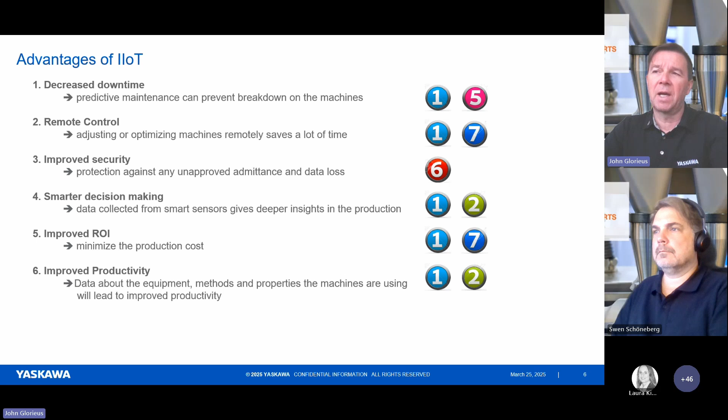But now the question will pop up, why didn't we use that already 20 years ago? It's a good question, but also the answer is easy. We didn't have the equipment and the know-how for this. The key to successful IIoT is AI. And what does it mean, AI? And what about machine learning or deep learning?

So in a later step, we used machine learning. A machine learning based algorithm is used to solve the problem of fruit sorting by enhancing the artificial intelligence based approach. When labels are not present, but the definition of what each fruit looks like is available, this is called feature extraction. To do this, characteristics and attributes that identify each fruit are used to create a blueprint. Characteristics such as the size, the color, the shape. If it's long and it's yellow, it's a banana. These characteristics are extracted and used to train the algorithm to classify the fruit.

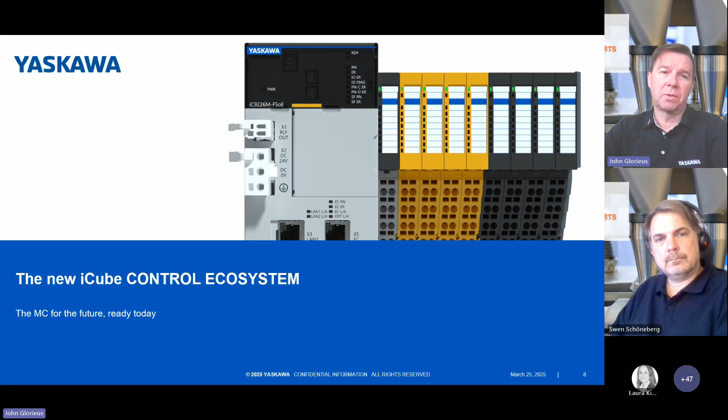This iCube control, the brain of it is the Triton chip, developed by our own company, ProfiChip. This Triton chip has a 3-core ARM processor with a clock speed of 1.26 gigahertz, which we need for the high demands on synchronous movements that we have.

Compared to other processors, we also have a much lower power dissipation, and derating starts only at 60 degrees ambient temperature. Therefore, we do not need a fan, which is very important in certain industries. So this feature helps us with challenge number 7, the sustainability.

The iCube has also an integrated safety master with FSOE as network safety profile, which can meet SIL 3 requirements. So you get more for a smaller price, helps you for challenge 1.

The iCube has a modular design built on a real-time Linux system, which we developed together with Phoenix Contact. This helps you also tackling challenge 1, because we make sure that you only buy what you really need for your application.

Our main network for motion is EtherCAT, but we also support other networks such as Profinet, OPC-UA, Modbus TCP, and Ethernet IP. So if your supplier can't deliver your product with a Profinet connection, for example, you can easily switch to the same product, but now with an Ethernet IP connection, for example. So your supply chain is flexible.

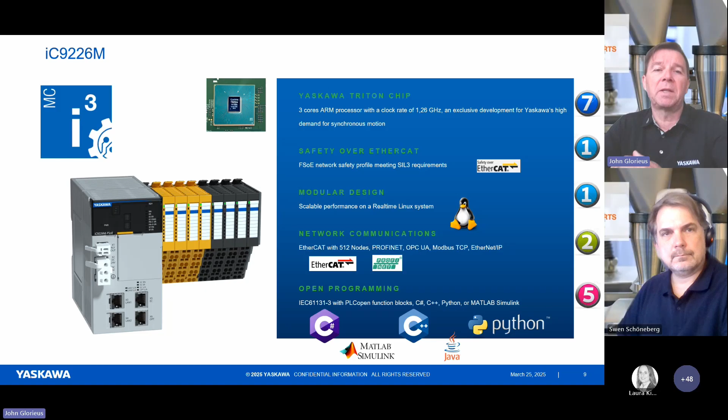Another great asset is the freedom of programming. So you can program not only in IEC 61131, but also in C#, C++, Python, Java, MATLAB Simulink. It's all possible. So you can really choose the language you know the best. This will help you finding the right people for your R&D department.

I explained before that the cloud is getting more and more important. But how can we connect our iCube to the cloud? There are several ways, but we start with connecting the iCube over one of those 2 Ethernet ports to the internet. Internally, these 2 ports are switched, but if you need 2 separate IP ranges, we can open the switch.

Since our platform is based on Linux, we can run all different kinds of Linux apps on our platform, even in containers. In the App Store, you can choose which app you want to use.

For example, the IXON Cloud app has a remote VPN access, or for data logging and alarming, or for MQTT data transfer. Another possibility is the ProfiCloud connector app for connectivity to the Phoenix Cloud. And another one is the IIoT library app for connectivity via MQTT to clouds like Azure, AWS, GCP. So this helps you encountering challenge number 7.

Decreased downtime can be achieved by using predictive maintenance, which prevents breakdowns on the machine. The iCube will collect all necessary data from the servo pack and send this to the machine learning algorithm, which is trained on the Yaskawa product.

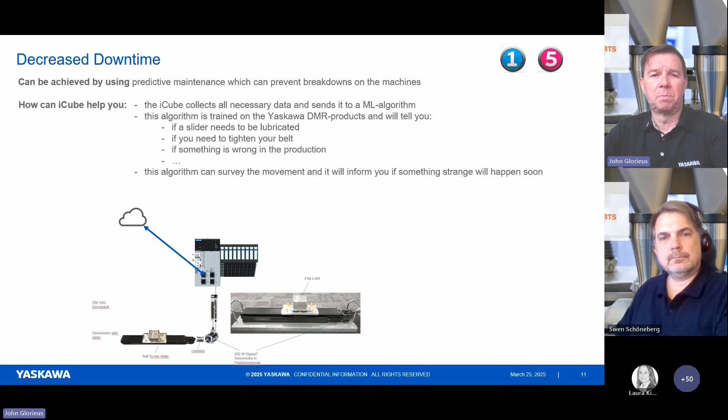But what you hear a lot in my presentation is sending data to the cloud. This means that your machine needs to be online. And then we should protect the system against unapproved admittance and data loss. So iCube...

developed a dual way of security with integrated security functions and settings in the WBM. The first one, the built-in features are based on the Linux operating system, and they have services like a firewall, OpenVPN, SFTP server, and so on.

And the second one, the settings that you can do with the WBM manager, like security profile that you can set up. You can have a user authentication. You can have a syslog configuration.

So these are all features that need to be updated constantly. And that's why we founded a new department. We have now our own cybersecurity department. So this is obvious. This is how to tackle challenge number 6 with this feature.

With our iCube, you have also the freedom of field bus choice. Like I said before, you can simply continue to use the devices that you control via EtherCAT, Profinet, Modbus, OPC UA, or Ethernet IP. The only restriction we have is EtherCAT is the only field bus for real-time motion commands with the FMK, the flexible motion kernel.

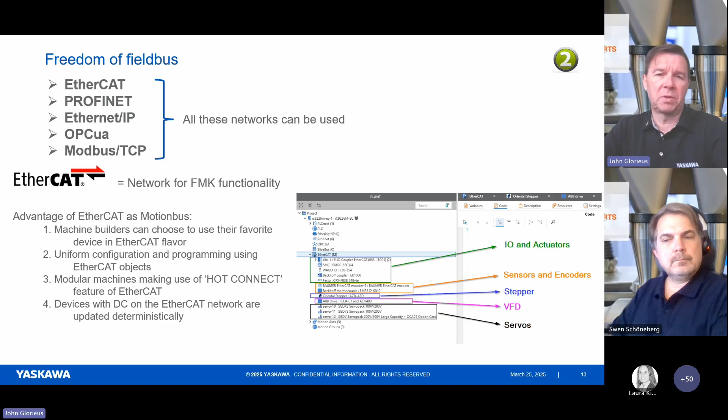I will show you briefly how we can add a product from a third-party supplier via an ESI file to our platform. First of all, we open a project.

Then we go to File and then Import, and there we choose Import ESI Files. Then we search for the correct folder on our PC and select the correct XML file. You can check if you selected the correct product and click OK.

Hopefully the snack bar will tell you that you imported this device successfully and that you will find it in the device catalog. The device catalog is on the right side, and if you click a few times, you will find exactly the device that you imported.

Now you can manually integrate your device in the EtherCAT device list of the plant. So the left side is the plant side, and there you can choose the stepper module that we integrated.

If you open the property window for your device, you will find all the parameters that the provider of this device makes available for us in order to operate this device in the right way via EtherCAT. So you see here error code, set point, control word, and so on. You will find all this as parameters.

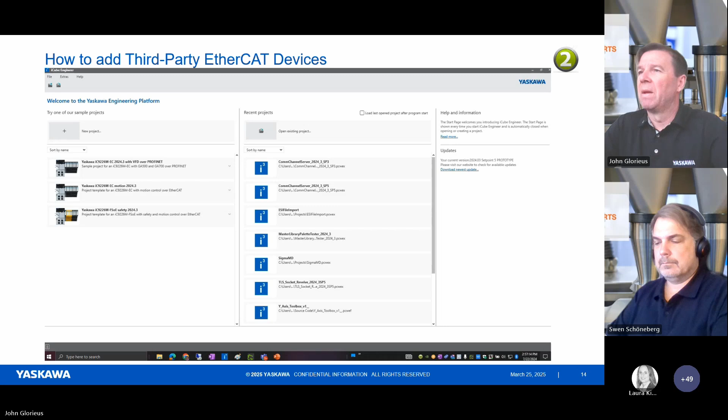Not only do we have a freedom of field bus, but we also have a freedom of programming with iCube. But also here we have some restrictions - not all languages can be used for all purposes. That's why we should have a closer look at our iCube architecture.

This is the architecture, and we can draw two lines over this architecture. The first line divides the platform into synchronous or asynchronous execution of your program, and the second line into running your program on the iCube platform or remote. In this way, we divide our architecture into 4 quarters.

The first quarter is synchronous execution running on the iCube. The second quarter is asynchronous execution also running on the iCube. The third quarter is asynchronous execution but remote, and the fourth quarter would be synchronous execution and remote, but this is not possible. So the first quarter means a program which runs in a real-time task on the iCube.

This can only be programmed with IEC 61131, C++, C#, and MATLAB Simulink. The second quarter is running directly on the Linux platform, but the code will run asynchronously to the real-time task of the iCube. The third quarter is to run the program on an external PC, but also asynchronously to the iCube real-time task.

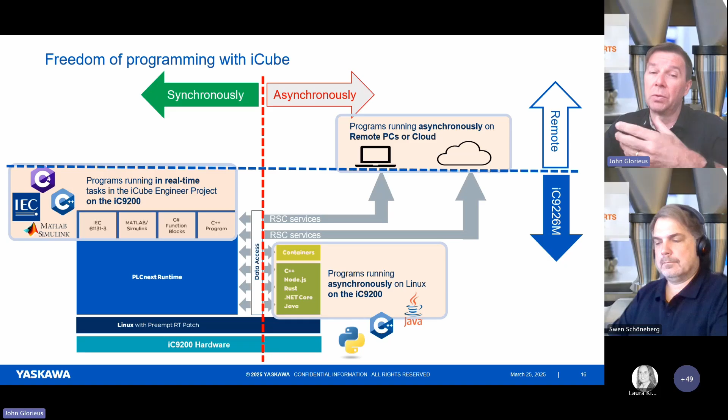So first, let's look at the first quarter and the possibilities to program synchronized to the real-time task. We can write functions, function blocks, and POUs in C++ and C# in Visual Studio or Eclipse.

Currently, we do not support MATLAB Simulink at Yaskawa. Phoenix and the PLCnext, they have that already, but we didn't implement it yet.

What are the advantages of C++ and C#, and why should you use it? Advantages are there are a lot of reference libraries available, for example. Another advantage is that for every 5 engineers who know C#, there's only half an engineer who knows IEC 61131.

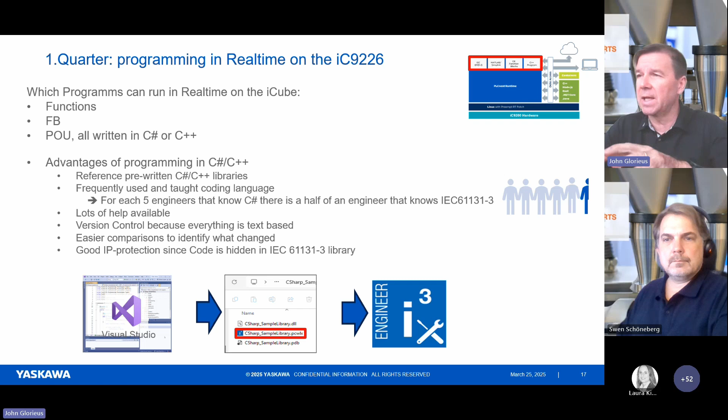Also, there's a lot of online help available. There's good version controlling. Easy comparison is possible. And good IP protection is possible because the source code is hidden in an IEC 61131 library.

So for programming in C#, Yaskawa delivers a toolchain with functions, function blocks, and programs. And this, like I said, is for Visual Studio and Eclipse.

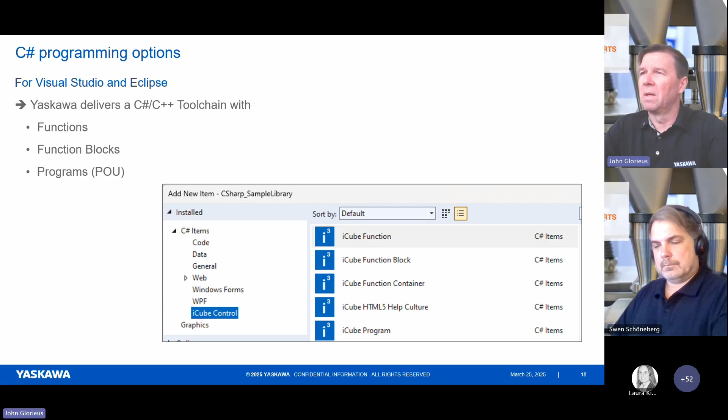Now I will demonstrate how a C# program can be integrated in an iCube controller as a library. The public classes that you define here will pop up as a function block in the iCube Engineer. In this example, this string example FB.

After compiling your project in C#, you have 3 different file types that are generated: a DLL file, a PCWLX file, and a PDB file. This PCWLX file is the file that you need to copy into the iCube Engineer library folder.

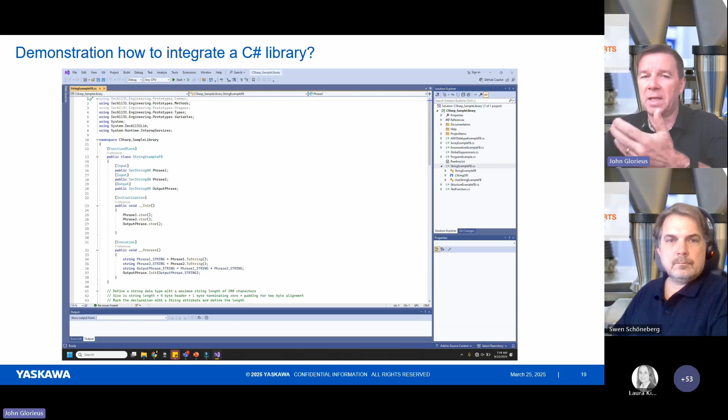If you do so, you can add this code as a user library in your project in iCube Engineer. You can now add the classes that you defined in C# as a function block in your IC library. So here, all the functions that you see were the classes that you defined in C#.

How can we integrate C++ in our iCube environment? For that, we offer you a C++ SDK, software development kit, which we deliver also for Visual Studio and Eclipse, and we have 3 different project types that you can use.

First of all, the PLM, which can run as a POU in a cyclic deterministic task. An ACF, the application component, which can run on the Linux section of our controller, and their execution is triggered by remote service calls. The last one is a consumable library project, which is just code that can be used in other projects.

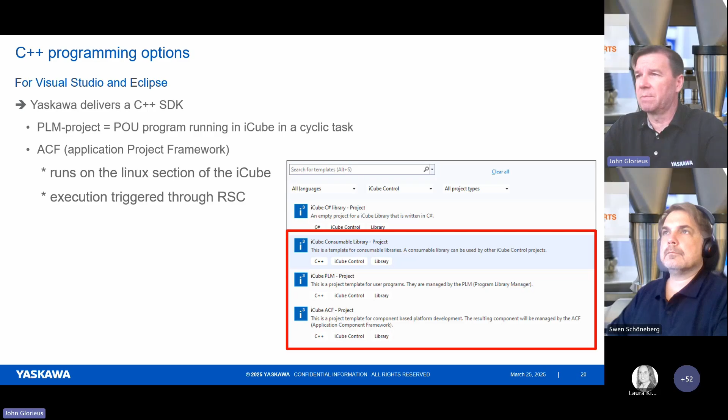I will demonstrate how to integrate C++ code as a POU. First we configure the in and out variables of the program.

Then you program your C++ code in the C++ environment. After saving and placing the file in the right folder, it will pop up in the component tree in the PLC Next component folder.

You need to configure this POU in the ESM task, where it will run as a real-time synchronous POU within an IEC task, for example in the fast task.

Communication with the other POUs is done with in and out ports on the global data space. So in the watch window, we can now force the variables, and you can see immediately what the program is doing with the output.

So this was the first quarter that we looked into a little bit in detail. Now we go to the second quarter, and there we have two possibilities. The first possibility is to integrate a programming running directly on the Linux platform of the iCube.

This means that our iCube is not just a motion controller, but it's a complete computer running on Linux. What does it mean? This means that all files are accessible like in Windows Explorer, which means that we have a consistent file management and file sharing, and also remote access is possible.

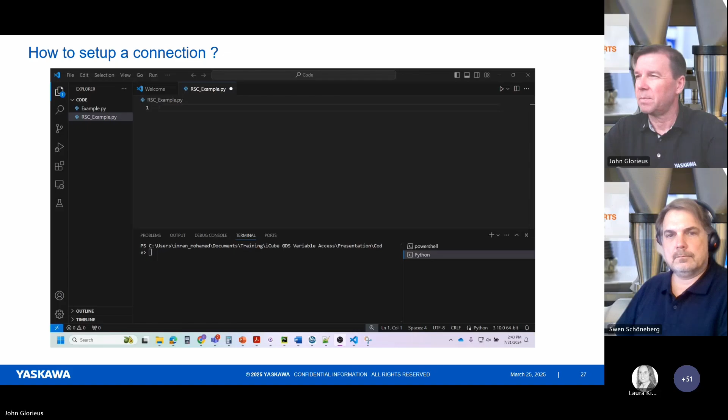So now we are online, and the next step, what we can do, we will read some info and some status data on the iCube. So how do you do that? You also need to import functions from that same library. In this example, we read the article number, or we will read the firmware status, the MAC address, and the status of the iCube.

And in the end, we will print this value to the terminal output. So as soon as we now start this command, you will see all data that we read from the iCube, like CPU load is here 2%. We see also the temperature is 46 degrees. So these are values that are coming out of the iCube.

Okay, another new feature which comes with the iCube is the integrated safety master. We only have two hardware variants in our iCube 9200 series: an iCube without safety PLC and an iCube with safety PLC. The version with the integrated safety master has only an extra board with an extra processor. This option card can only be mounted by Yaskawa, not by yourself. This FSOE master is a SIL 3 certified safety master, which is fully integrated in the runtime system of the iCube engine.

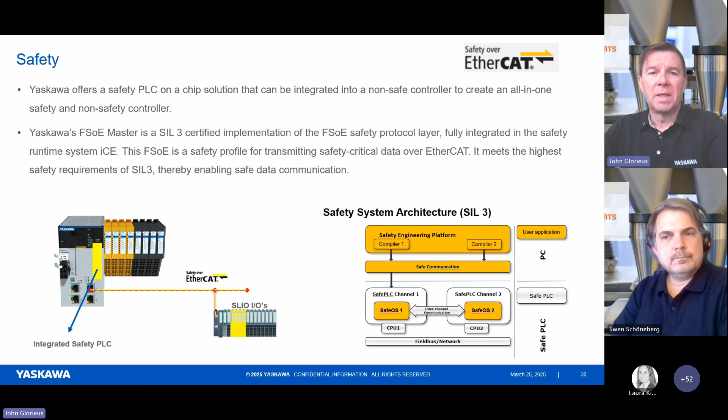It's a safety profile for transmitting safety critical data over EtherCAT. This means that safe and non-safe programming are integrated in one environment. To make the life of a programmer easier, we have a TÜV certified library with the most common FBs that you will need for setting up a safety program, such as emergency stop, two-hand security. You can find all of it in our safety library. The safety program can only be written in function block diagram or in ladder. And to check if a program has changed or not, we have a network granular CRC checksum.

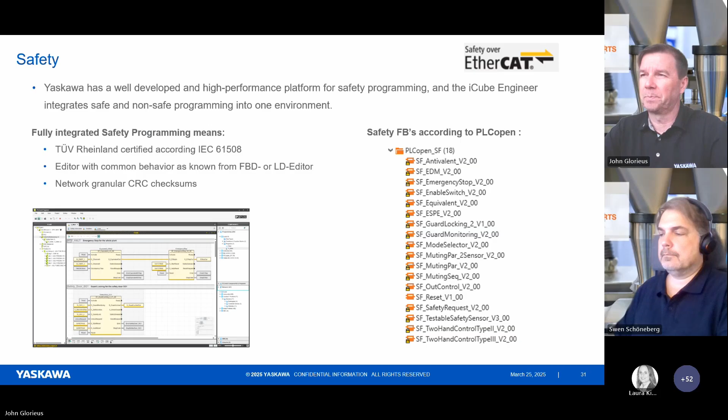Here you can see an example with the SLS function, the safety limited speed. If someone is coming too close to the machine and crossing the proximity switch, the machine should change to a safety limited speed. The signal coming from the proximity switch is dual channel connected to our safety input terminal. These safety input signals are connected to the inputs of the SFGuard FB, and the output of this FB is putting a signal on the safety bus. The signal is read by the servo pack, and depending on the parameters in the servo pack, the motor needs to slow down to its safety limited speed. So that's an easy example of safety limited speed.

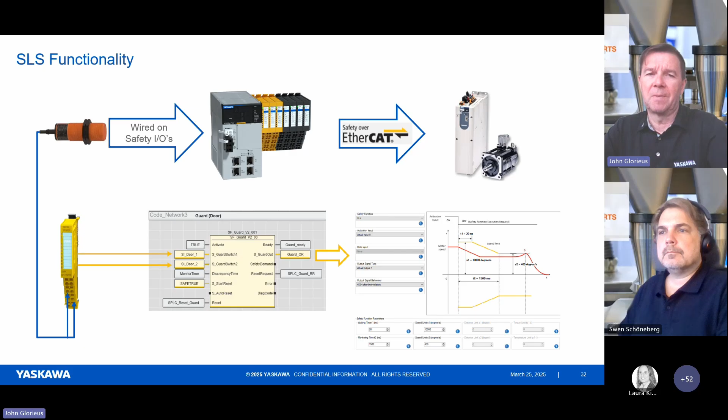Another safety example is shown here: an emergency stop is dual channel connected to one of our safety modules, and the inputs are serial wise connected to the safety FB, the SF emergency stop. If someone pushes the emergency button, the output of this function block will generate a signal on the safety bus, and depending on the parameters in the servo pack, the motor will stop.

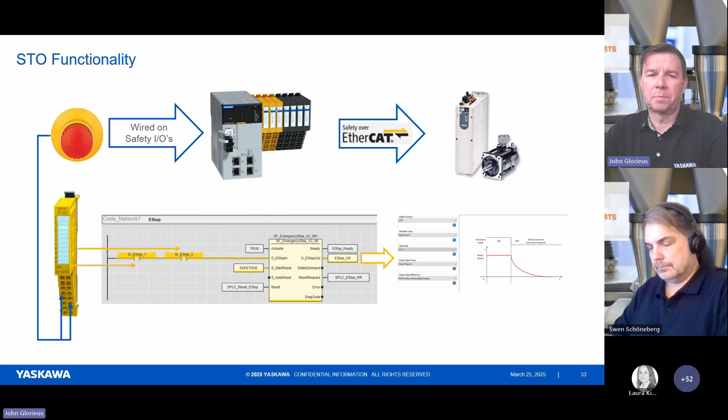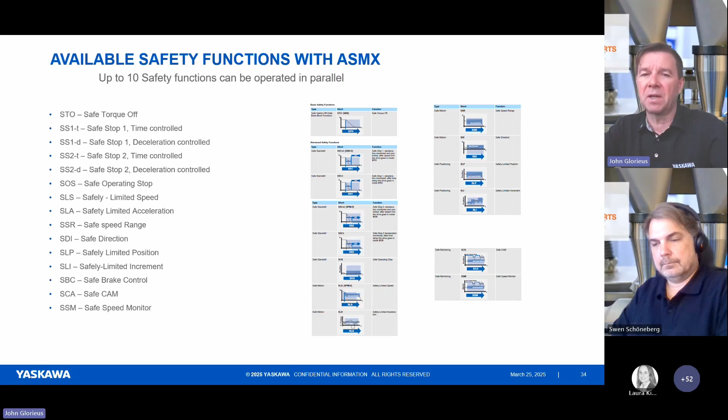We have 15 different safety functions available on our safety card, and we can operate 10 safety functions in parallel on one servo pack. These functions are only for monitoring in case of an emergency situation. The way the speed is changing is calculated in the motion controller, but it needs to correspond with the settings on the safety card. If not, we will go to the next safety function, and mostly this is an STO. So if your speed is changing not in the way that it was parameterized on the safety card, we will go into STO.

This is a typical old architecture our customers were using in the past: an MP3200 for the motion part, on top of that a PLC for general control of the machine, and a safety PLC for the safety part of the machine, mostly even hardwired.

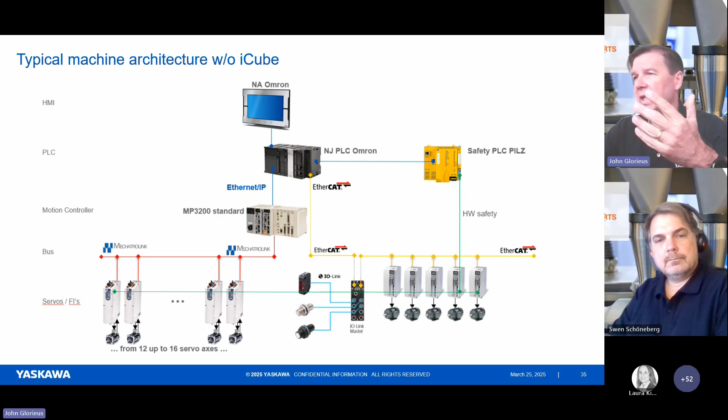With iCube, the architecture will look like this. PLC, motion and safety are all centralized into the iCube, which means that you only need to manage one program file. And the safety commands are sent over FSOE to our servo packs, so no longer hardwired.

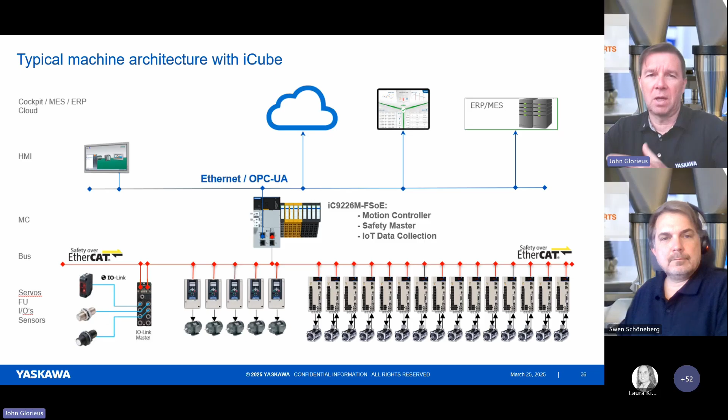Also, controlling robots with our iCube has never been so easy, but we need to differentiate here between self-hosted and remote hosted. Self-hosted kinematics are controlled by our servo packs like a Sigma 7 or Sigma 10 without any extra hardware. So all kinematics are calculated in the iCube, and we send every cycle new positions to our servo packs. In this way, we guarantee a tight synchronization between all robots and also with other auxiliary axes. If you have a frequency inverter or some other servo packs, it's really tightly synchronized.

Self-hosted kinematics are Delta robots, SCARA robots, custom-made mechanics. The only disadvantage we have here is the missing of FSU, the functional safety unit. But mostly these mechanics are used in line, and as soon as someone opens a door, the whole line will stop. So it's an easy safe torque off.

The remote hosted kinematics still need a robot controller, which means that the calculation of the motion path is still done on the robot controller. The advantage with this solution is that you still can use the FSU, but disadvantages are the need of the robot controller and the activation of the MotoLogix feature.

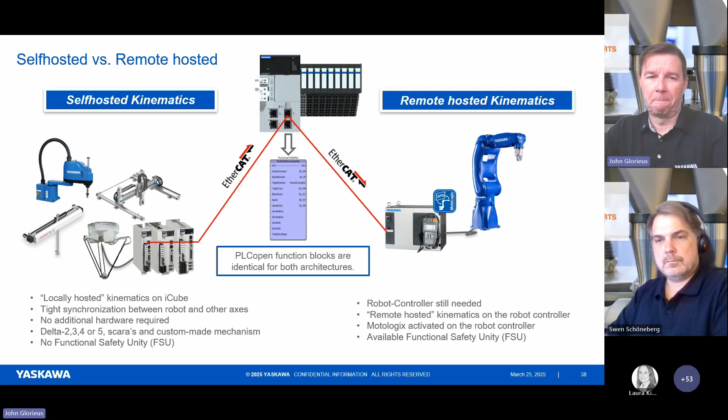Which robots can we control now? Every robot connected to a DX200, every robot connected to a YRC1000, and every robot connected to a YRC1000 Micro, we can control over MotoLogix.

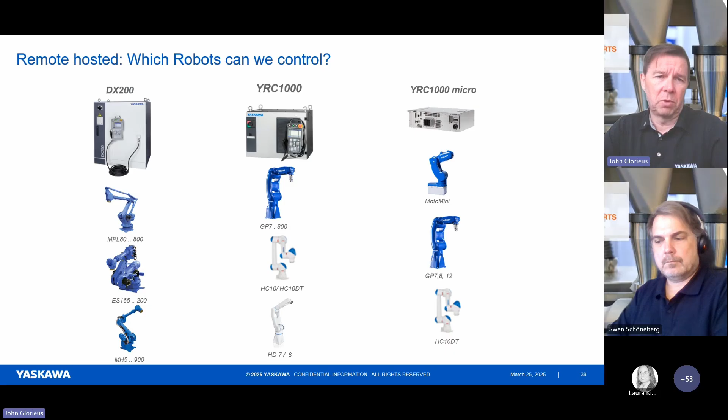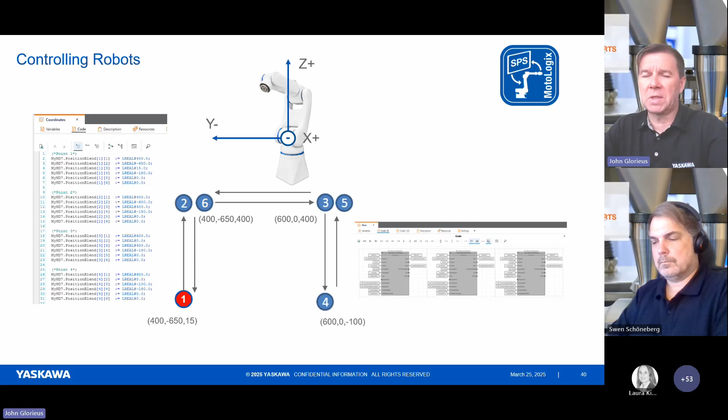Which is then connected to the function blocks that you need, and that's all. If we have a closer look at those function blocks, I've used here the MC Move Linear Absolute. This function block is used if you move between two points in a linear way. This corresponds with the MOVL that you know from robotics. There you need to enter some parameters, exactly like you do when you program with the teach pendant. You need to specify, for example, the coordinate system. Is it in machine coordinates? Is it Cartesian, or are you working in world coordinates? You also need to enter the blend factor you want to use, and so on.

So for a normal PLC programmer, it's very easy to program a robot movement.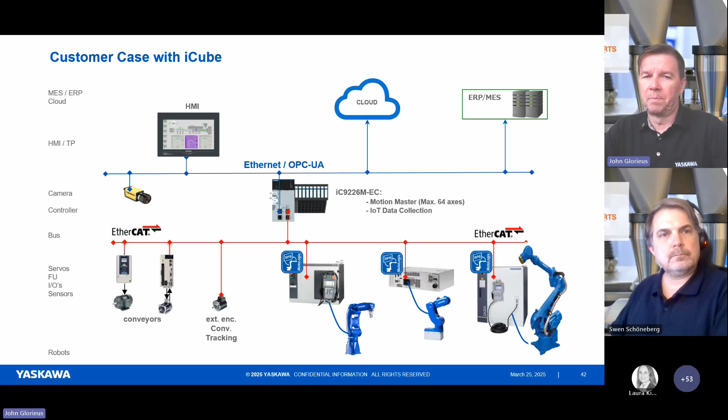So the other way was the self-hosted way, and now we should explain which kinematics we can use there. First, there's the group of Delta and SCARA kinematics and all their derivatives. Then we have all kinds of custom-made kinematics which we can control, but here it's better to work together with Yaskawa to get your special kinematic integrated into our iCube. And finally, we have the industrial standard kinematics like T-bots and H-bots.

The only limit that we have here is the 64 axes that we can control maximum with one iCube. So if you have, for example, a Delta robot with 4 axes, we can control up to 16 of such robots with one iCube.

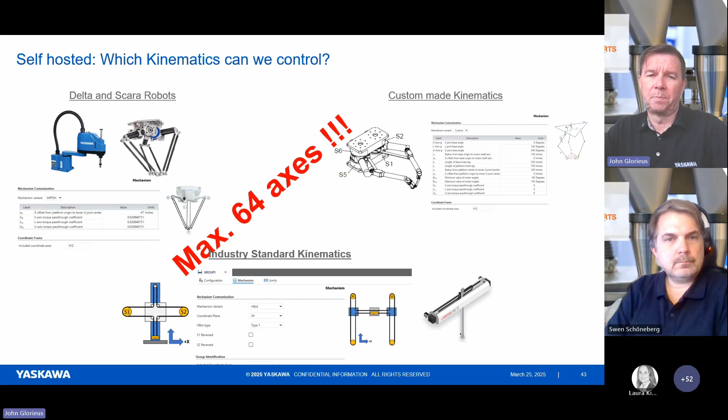But to make the life of a programmer easier, we've developed some generic solutions. The first generic solution that we've developed is the MotoPick for iCube, and as you can see here, the maximum amount of robots that we can control is 16. With this MotoPick solution, you don't need to program your pick and place application anymore, you just need to parameterize. Features like conveyor tracking, vision, load distribution, multi-gripping, pick and place, and a lot more are all integrated.